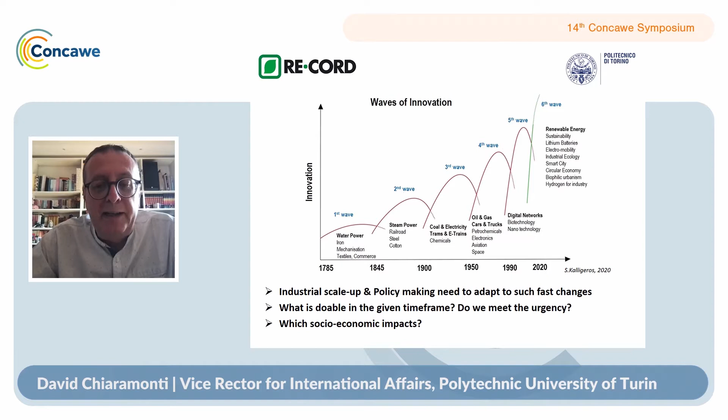If this can meet the urgency we had due to the climate challenge, and also as remarked a couple weeks ago by Timmermans, which are the socio-economic impacts of introducing innovation and how to build consensus. I like to repeat that one of the Green Deal's most important points is no one left behind. That is also a very important value for our community.

So I was invited to talk about thermochemical conversion, which mostly is fast pyrolysis in general, gasification, hydrothermal processing, hydrotreatment. In a biorefinery context, this is the part where you operate at high temperature with catalysts and all the steps we know. However, it's a major point for me to remark that this thermochemical pathway more and more should be seen as an integrated way with biochemical conversion.

Just to make a very simple example, in a lignocellulosic ethanol plant, we have biochemical processes based on enzymes and yeast producing alcohol or a variety of other fermentation products. And then we have the lignin part that could be very well treated with many of these thermochemical processing systems. Probably the real best economic solution is the one that integrates this variety of options into a single whole.

Among these, I will focus a bit on HTL and slow pyrolysis, because fast pyrolysis, gasification, and refining, I know will be the subject of the following presentation.

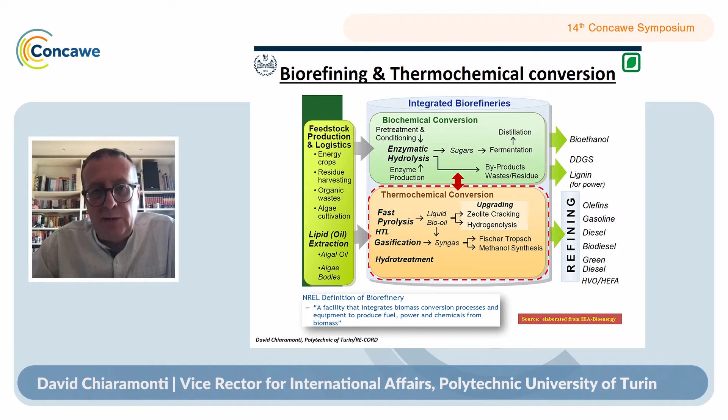I mean, most of this process, as said, produces several products, liquid, solid, and gases, that can be conveniently integrated and regenerated. Let me make one small remark.

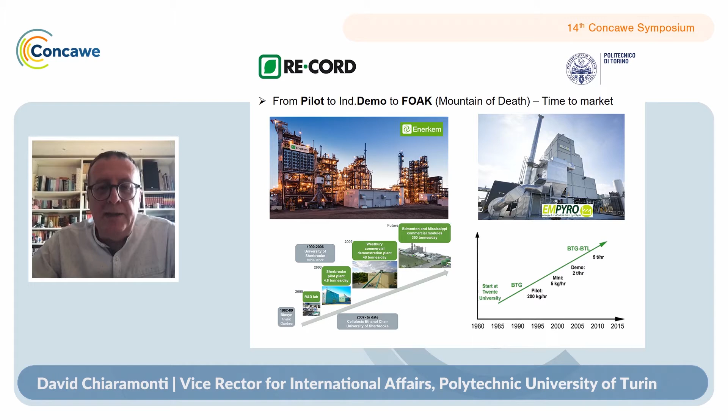Of course, today we have some advantage because many of these technologies already went through this pathway. So we can act a bit more quickly. But if you put this in the so-called mountain of death, well, actually what you see is that HVO is fully commercial. Others are coming very, very rapidly, even I would say, like fermentation of CO2 to ethanol, the conversion of HVO to HEFA for jet application.

Fast pyrolysis in co-processing particularly is ramping up quickly, and policy is following. And also gasification to various products, from Fischer-Tropsch but also to methanol and ethanol, is quite close. It's in the first-of-a-kind stage, and a lot of attention is given to waste-based feedstock in that area. Also, HTL and e-fuels are coming.

There are some scale-up projects in the hydrothermal liquefaction phase. E-fuels are a major point in European policy, and we can expect a contribution between 3 to 5% probably by 2030 with e-fuels, if the policy follows.

These slides have already been shown, so I will only pick up a key message here: the Concawe estimation, which I personally agree with, expects the ramping up and scaling of these technologies, particularly lignocellulosic and e-fuels, post 2030-2035. Having a demo plant is one thing; having many industrial scale plants producing millions of tons of products is another. That's a kind of misalignment with European policy that should be considered.

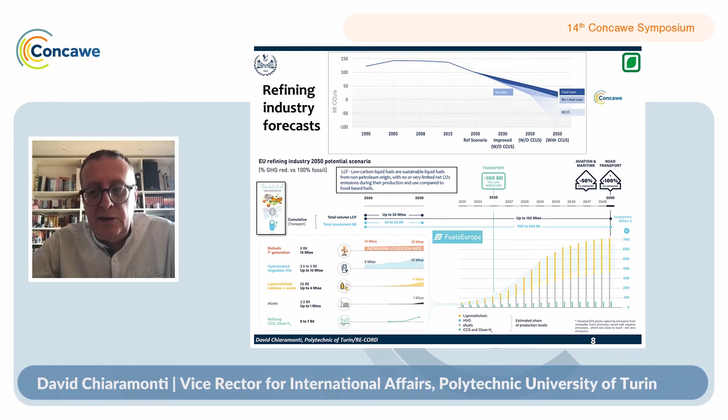Biomethane also can help a lot in the transition, contributing significantly in certain countries.

Following this, the net zero IEA report came in, which is very aggressive and, on the other hand, compatible with the targets we have set, with the goals we have established. It's a very strong roadmap, with no more internal combustion engine car sales by 2035.

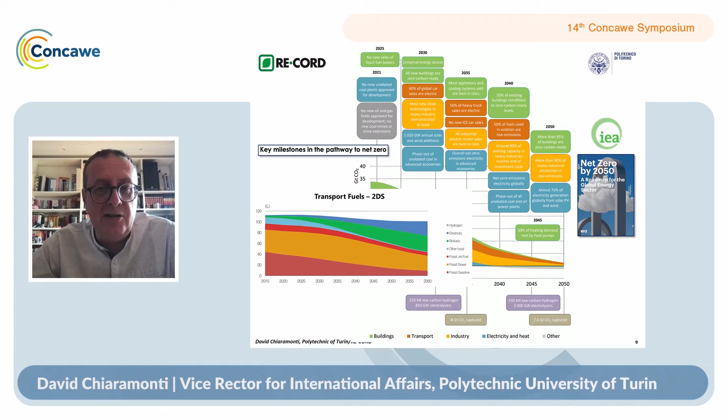Compared to a previous IEA study like the sustainable development scenario, the two degree sustainable development scenario by IEA, the contribution of the different sectors was a bit different, even at 2060. Now there's a clear acceleration. The question is, are we able to follow such a strong path?

I will focus now, in the last part of my presentation, on a couple of issues. One is thermochemical conversion, from pyrolysis and gasification. That's a process that always produces solid, liquid, and gas, requires dry feedstock, and can operate at very different conditions. It has quite a good level of maturity in general, and is more or less feedstock sensitive depending on the type of process considered.

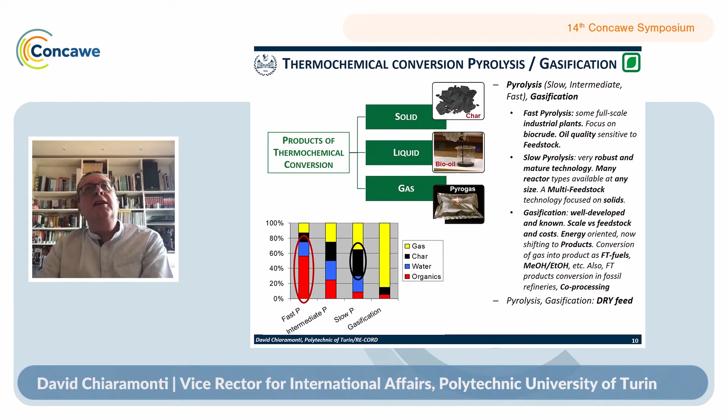Hydrothermal processing instead is mostly hydrothermal carbonization and hydrothermal liquefaction. For fuels it's liquefaction, which operates in very severe conditions, 220 bars, 374 degrees being the critical point for water. It operates in slurry conditions where up to 23% of solids is contained in the liquid phase, which is normally water but not necessarily just that.

Technically speaking, this is obviously a challenging type of plant, which is scaling up in Canada and Norway. A few pilot installations exist in Europe, particularly in Denmark, Italy, a few other places, and in the US at PNNL mostly. It processes very wet feed.

On the HTL side, there are routes for development in that period. The focus, again as in all this sector, is being assigned to residual waste feedstock, and there are companies like Genifuel, Steeper, ENI, Mura already working at demo scale on this feedstock. There's also the possibility to co-liquefy feedstock with some advantages for the technology. Not to forget the relevance of water management, I will come back to this in a moment.

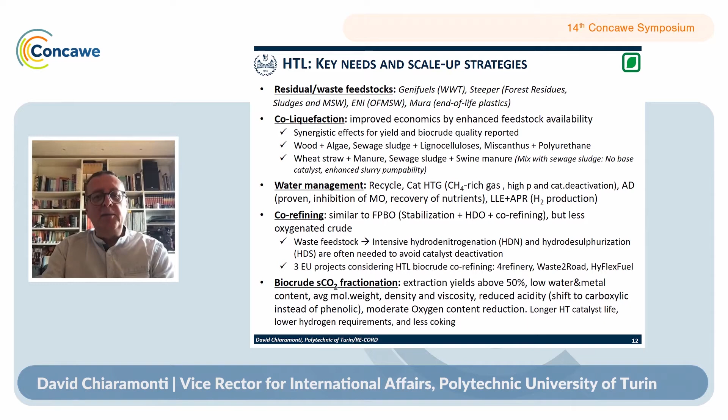Co-refining could also work similarly to what is being done for fast pyrolysis bio-oil, even if we have to consider that getting a less oxygenated biocrude is an advantage, but it is very viscous stuff which can contain heteroatoms. Also, supercritical CO2 fractionation is under deep investigation.

I wish to focus a second on phase management, water phase management, because in the water we do have soluble water organics. These can be treated in various ways, even catalytic hydrothermal gasification, or even digested through a biochemical process, again in the case of integration between bio-based and thermochemical-based processing. But one thing I'm very keen on is that this can be used for hydrogen production.

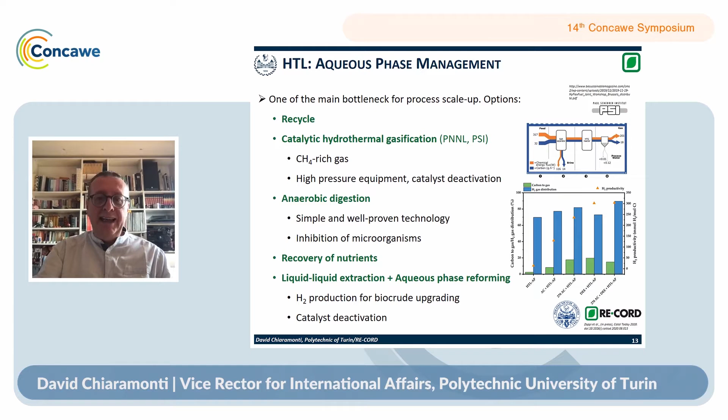In our joint group, Polytechnic of Turin and RE-CORD, we have applied a technology named aqueous phase reforming, and the amount of hydrogen is quite relevant compared to the amount of dry hydrogen needed theoretically to refine the biocrude obtained, from 40 to some 70-80%, depending on the feedstock type, process condition, and other elements. So the water phase, which inevitably needs to be recycled in processes like this, can be a good source of green hydrogen in a fully circular form.

In the last part of my presentation, I wish to show some innovative schemes beyond the technology, combining bio and thermal. For example, many decentralized natural gas plants use the natural gas grid exactly the same way as we use the electrical grid with photovoltaics and wind energy. This natural gas delivers an equivalent amount of volume of natural gas to a centralized processing facility that can then deliver Fischer-Tropsch, methanol, ethanol, and many other products.

The guarantee of origin is the means to guarantee that there is no double carbon counting for this carbon, and that exactly the amount of normal cubic meters delivered by natural gas is delivered to the centralized processing. This is based on mass balance. Italy can rely on more than 33,000 kilometers of gas pipeline, so it's a good way to deploy the existing infrastructure and to deliver from the gas a product that is needed.

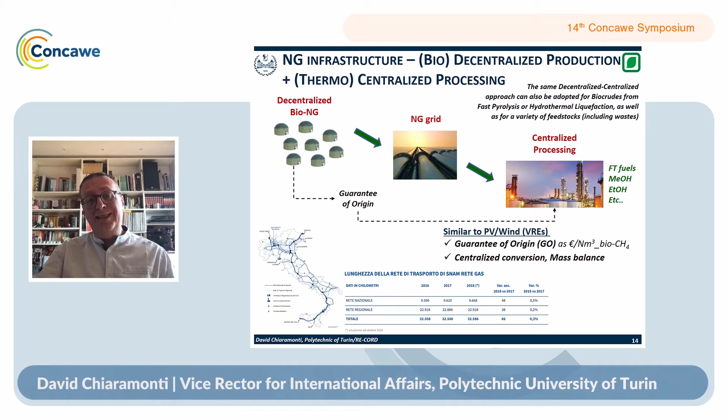Also delivering benefit in a decentralized way, so creating consensus. Another possible approach is so-called biomethane, or methane pyrolysis or cracking, or direct methane decarbonization.

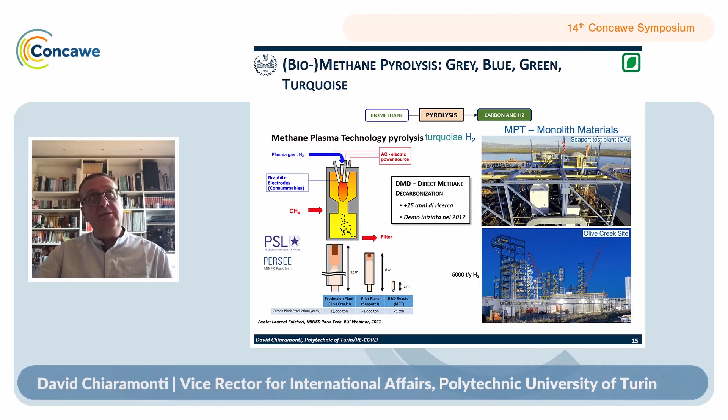This is a site in the US which already reached 5,000 tons per year hydrogen production through thermochemical processing of the methane. This is done in a special way in a process developed by École des Mines in France more than 25 years ago. But there are other ways to do this.

We have developed a very original other route to process the methane into carbon, solid carbon, and hydrogen. The interesting thing is that it promises to be very competitive. I remind you that today we are in the range of $4 per kilogram of hydrogen, while our target is $1.5 per kilo of hydrogen.

This biomethane pyrolysis seems a promising way to reach this target, even if TRL is lower, and there are a number of competing solutions like ours, like the one I've shown, that need to be further developed. That's the moment to invest in this.

Aviation has been mentioned as a priority. ICAO, which I participate in, this team, has shown a huge need to intervene through the CORSIA program. It can be very well targeted by gasification and pyrolysis. Personally, I have my opinion that pyrolysis can very well target maritime for a number of reasons related to the biocrude characteristics.

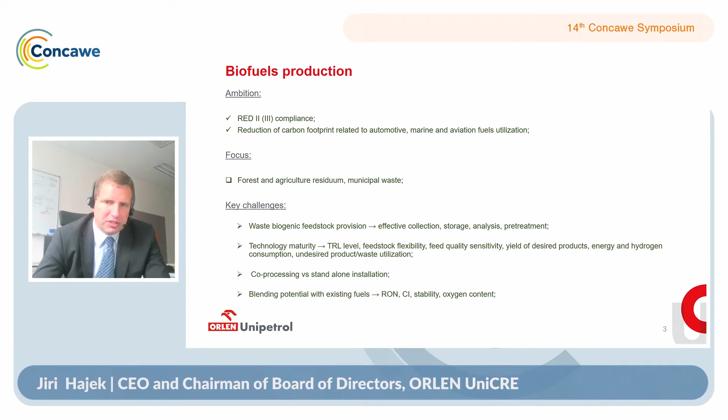I would like to briefly share with you the outcome of our COMSYN concept, which we have studied over the last couple of years together with colleagues mainly from VTT from Finland and other partners from Germany and Italy. The concept was focusing on the gasification of forestry residue, aiming to convert the gasified material into Fischer-Tropsch products and accommodate those Fischer-Tropsch products either in the refinery or introduce them to the steam cracker.

The ambition was to deploy a concept which will enable us to operate a unit with a capacity of 150 megawatts at the gasification stage and reduce production cost in contrast to the alternative routes by 35%. And we wanted to deliver the fuel with a cost below €1. Actually, the aspiration was to achieve 80 cents per liter.

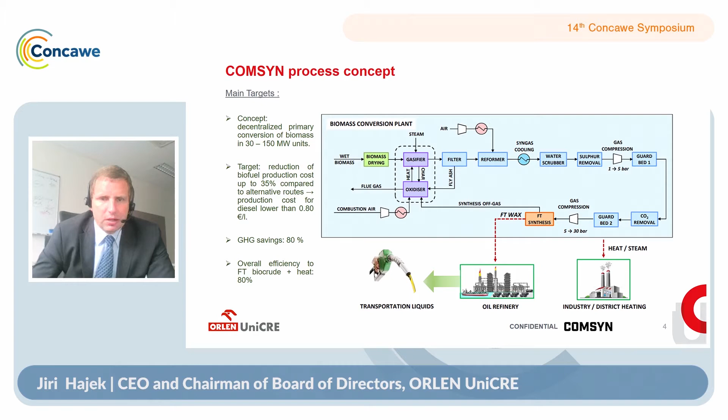Ultimately, the overall aspiration was also to achieve greenhouse gas savings in the range of 80%. And similarly, the efficiency should have been elevated. What we have achieved shall be demonstrated on an upcoming slide.

For those who are not very familiar with the entire process, with the entire concept, I would like to stress that the gasification and the consequent Fischer-Tropsch technology produce not only gaseous, but mainly liquid products. Not only liquid products, but also waxy products. The yield or the split can be adjusted according to the needs of the particular operator.

But we can say that in our case, we were targeting mainly the hydrocarbons boiling in the range of 140 to 240 degrees C, but also we produce a significant amount of waxes, which shall be effectively introduced as a feedstock to the existing hydrocrackers.

So in principle, I would like to stress that the flexibility of the operation of the particular Fischer-Tropsch technology very much depends on the desired yield pattern, as well as on the operating conditions of your technology. What can we achieve by doing this?

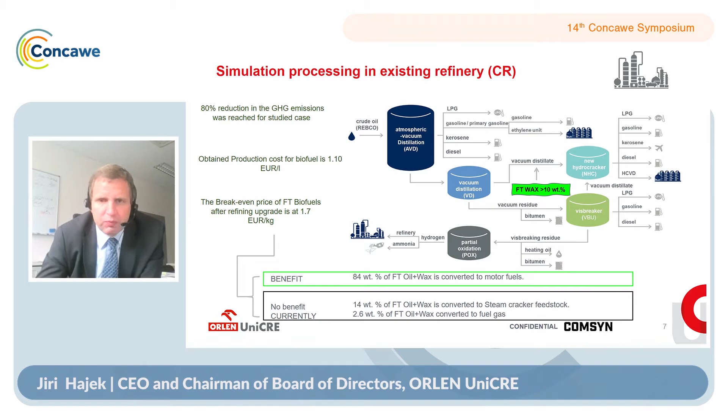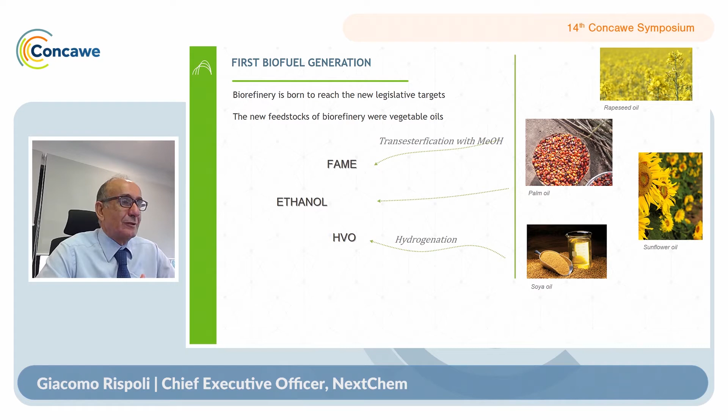Going ahead, the products that we had to generate as biocomponents, at the beginning we have and still have FAME for diesel, we have ethanol for gasoline, we have hydrogenated vegetable oils also for diesel. These are the new feedstocks, the biofuel stocks that help to reduce CO2 emissions.

But then the European Parliament said, look, we have to pay attention not to be in competition with food. So the European Parliament limited to 7% the use of first generation biocomponents, and then introduced the concept of advanced biofuels that cannot be in competition with food.

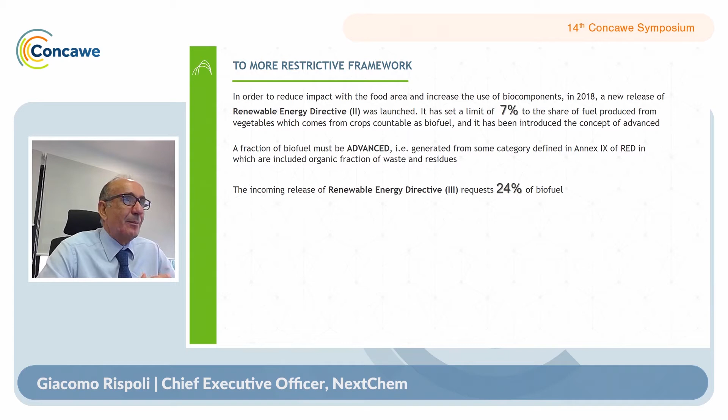Now, with the first draft of RED III that we have looked at, we see that the quantity of biocomponents should be increased, arriving at up to 24% for biofuels. This means there is a huge effort we have to make in order to create more biocomponents and fuels with low carbon footprint for diesel and gasoline. For these reasons, we looked at this new concept of biorefinery.

Biorefineries played and are playing an important role today, but in the future we imagine the biorefinery with different feedstocks, based on municipal solid waste and non-recyclable plastics.

But why are we looking at feedstocks such as these? Because waste contains a lot of carbon. If you look at these slides, there are two important messages I would like to deliver to the audience. One is that today the total municipal waste produced in the world is in the range of 2 billion tons per year, and this is expected to more or less double in the next 30 years.

The second message I would like to deliver is that in this municipal waste and in these non-recyclable plastics, there is still a lot of carbon and a lot of hydrogen. So our idea is to take advantage of this hydrogen and carbon to reformulate new hydrocarbons.

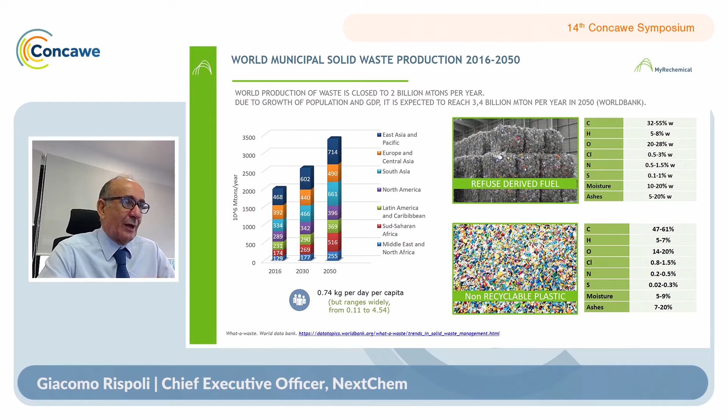Now, in what way can we imagine this new concept of biorefinery? This new biorefinery can be organized in 3 blocks. In the first block, we have in our scheme a waste partial oxidation, where we create - no longer incineration, no longer total full oxidation, but just a partial oxidation to create a syngas.

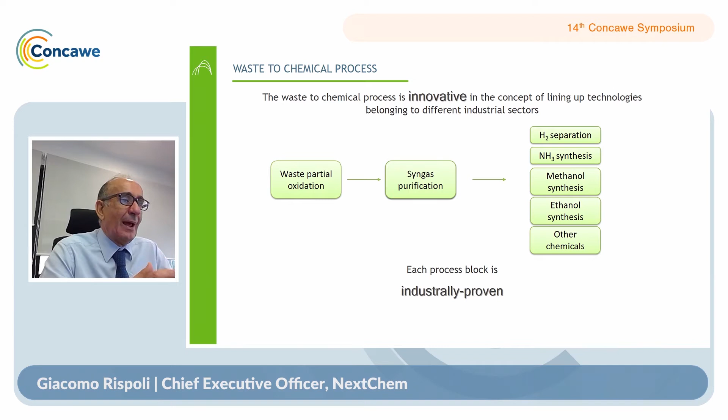Once the syngas has been generated, it will be purified. So there is a second block for purification, and then when we have the syngas purified, we can apply existing technology to produce hydrogen, methanol, etc.

But how does our system work? It is in this slide. I would like to summarize how the system can work. First of all, our feedstock is not all municipal solid waste, but our target is to first recycle and recover everything in accordance with the best procedures.

But once we look at the bottom of our pyramid as the feedstock, it is something that today is sent to incineration. Instead of sending it to incineration, we send this to our reactor. In this reactor, working around 1,000 to 1,200 degrees C at the top, the carbon and hydrogen are converted into syngas - a mixture of carbon monoxide and hydrogen.

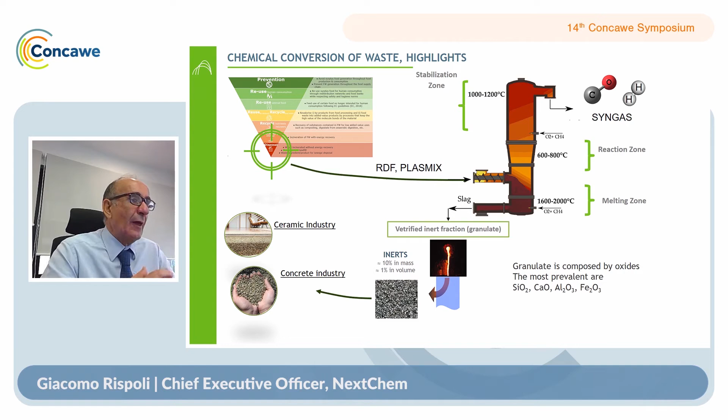The gas generated is washed first with water, then with hydrochloric acid, and then there is a neutralization tower. The bottom that we generate, containing inorganic components, is more or less 16% of the waste. So our technology looks like a sort of full conversion, a waste full conversion technology.

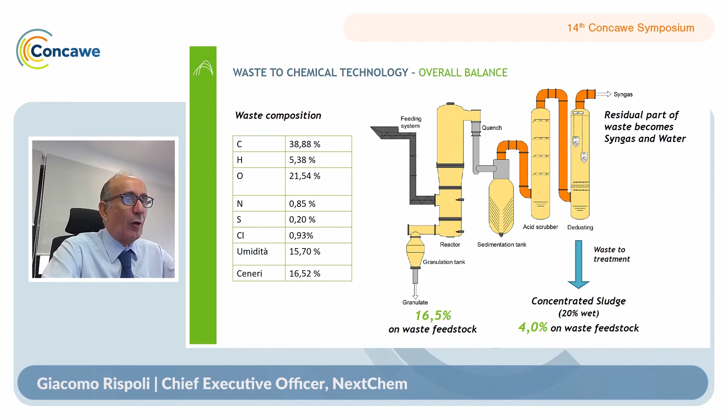The only product that we have to deliver as waste that we generate is the concentrated sludge that we remove from the neutralization tower. It is in the range of 4%. This means that 96% of the feedstock is converted completely.

Now, once the syngas is generated, the main products we are looking at are methanol. And with methanol we can produce FAME, diesel, MTBE, but methanol is also very important as bunker oil, because methanol can replace bunker oil. We can also generate hydrogen directly, for fuel cells, but also hydrogen that can replace part of the fuels in the shipping industry, and also green ammonia. But with syngas we can also generate ethanol, which can be used directly in direct blending for gas. Or we can generate methane.

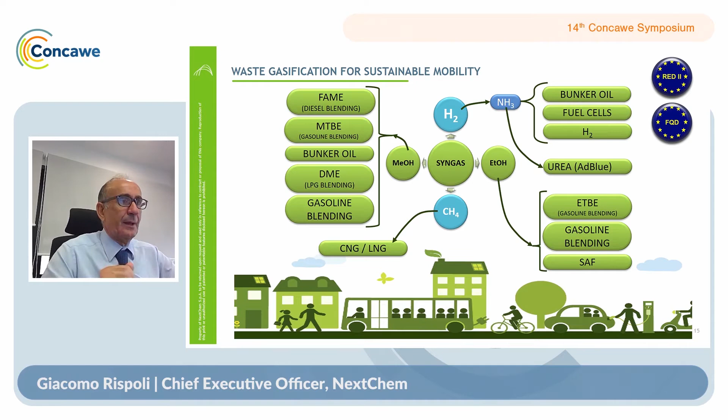Now, in this slide, without going into details, I would like to leave the participants of this symposium this material balance, where I base this business case in terms of waste to methanol and hydrogen. In our case, with the total material balance, you can see that with more or less 200,000 tons per year of waste, we can produce 90,000 tons of methanol per year, and more or less 2,000 normal cubic meters per hour of hydrogen. So we imagine these schemes that allow the production of methanol and hydrogen.

And in this way, as the demand for hydrogen increases, we can increase hydrogen production and reduce methanol production. The capex that we imagine for this unit is 220 million euros with such a capacity, looking of course at inside battery limits. And the IRR of projects like this is in the range of 13%. So a double-digit internal rate of return is a significant figure when you talk about green economy.

Then this slide is also very important, because the products we mentioned can generate important environmental benefits. Now, of course, we have to reduce the CO2 footprint. We would like to still produce products for our cars, for internal combustion engines, but of course with much less CO2 footprint. And in our case, the product that we generate can save more than 80% of the CO2.

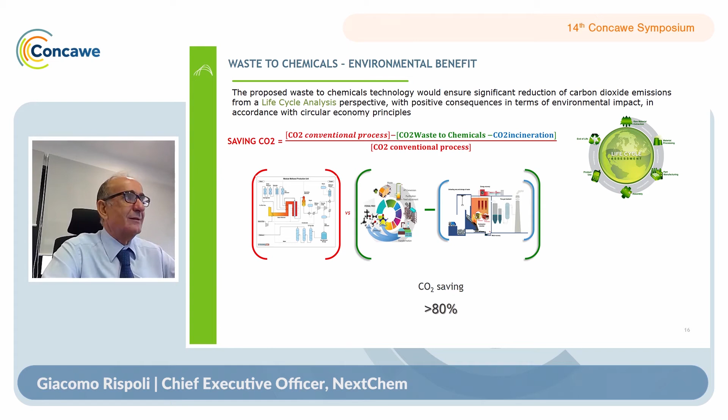Now, but in this part of the symposium, we are looking at refineries. In the introduction, it was said that refineries, during this CO2 reduction roadmap, can play an important role, can be part of the solutions. And so such kind of units can be located, can be hosted in the refineries. Why? Because refineries are still brownfield available, and because in the refinery we have existing facilities that can be easily integrated with our process.

In the refineries, let me tell everybody that in the past, in another organization, I was twice a refinery manager. I know very well that in the refinery there is huge knowledge available. And this huge knowledge available is something very important to operate such kind of units, which are more or less like conventional units present in refineries or petrochemical complexes.

And then oil companies are also the off-taker of the products, because if we produce ethanol, if we produce hydrogen, if we produce methanol, the oil companies need to produce biocomponents, advanced biocomponents, and so they can be the off-taker. And then such kind of units in the refineries can give a contribution to CO2 footprint reduction.

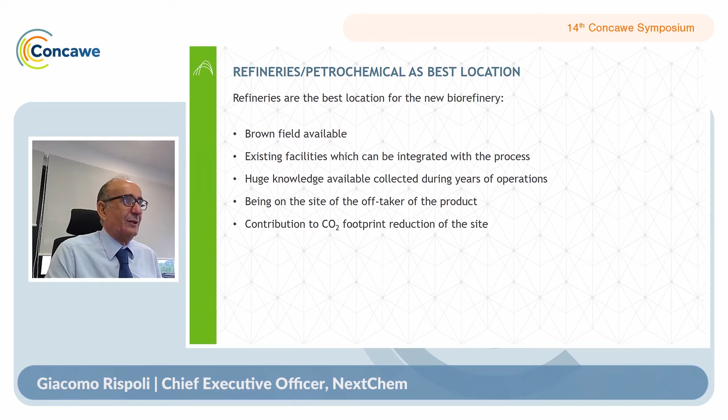Now, let me say a few words about the value of the products we are going to generate, because such units are significant and important from a CapEx point of view. But what will be the price of methanol? If we are going to produce methanol, what will be the pricing?

First of all, in accordance with RED II, but also with the draft of RED III, this kind of methanol is considered a recycled carbon fuel. And part of these recycled carbon fuels is considered advanced biofuel, because part of the carbon contained in the waste is from biogenic derivation.

But look at the price. How do we assess the price of this methanol? The conventional price of methanol currently is more or less 400 euro per ton. So we assume we start from the price of FAME, which is around 900 euro per ton, with 38 megajoules per kilogram. Our methanol has 20 megajoules per kilogram, so it's very easy to find the value: we divide 20 by 38 and multiply by 900. This way we correlate the price of methanol with the price of FAME.

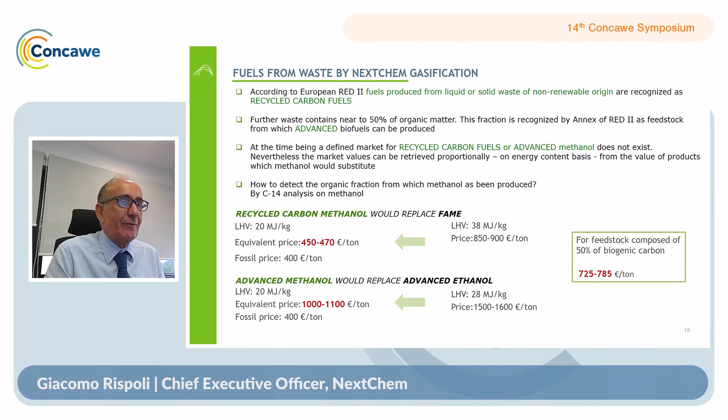If we would like to imagine the price of ethanol, it's more or less the same approach, making use of the price of ethanol in the market, which is 1,500 to 1,600 euro per ton.

Now, time is completing, so let me go to my conclusion. To summarize, the technology we generate as NextChem is a robust and commercially proven technology. Why commercially proven? Because it's a combination, as I mentioned at the beginning, of three different blocks, and every block that is part of this unit has been operating for a long time.

This process represents, in any case, a viable economical project, and waste is a valuable source of carbon that can be used. We call waste a sort of oil of the third millennium. So it's a pity to treat waste just by incinerating it to produce power. With the waste, we would like to create, with a circular economy approach, new products. So waste, with this concept, becomes once again a raw material.

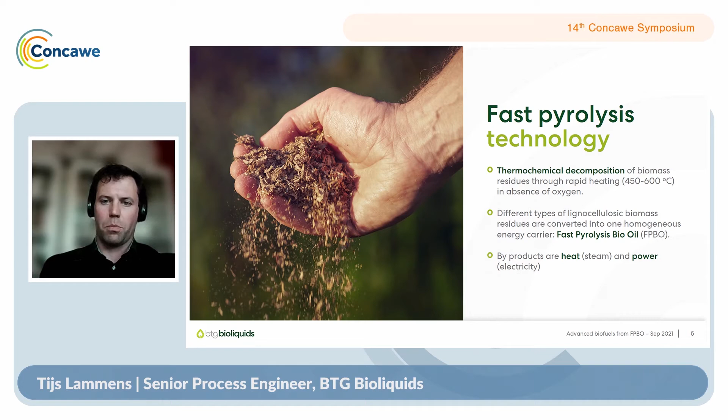The vapors then go through 2 cyclones into a condenser where the actual bio-oil is formed, and that goes to a storage tank, while the char that is produced with the pyrolysis process goes together with the sand and air up into a combustor. In the combustor, the char is combusted, and that creates the heat to keep the process running and to further crack the biomass again. So it's a self-sufficient process. All the heat that we use is produced by the process itself, including the heat that is needed to dry the biomass beforehand. And then also there can be an excess of heat which can be exported to external clients and even turned into power if you want to supply the power for the plant.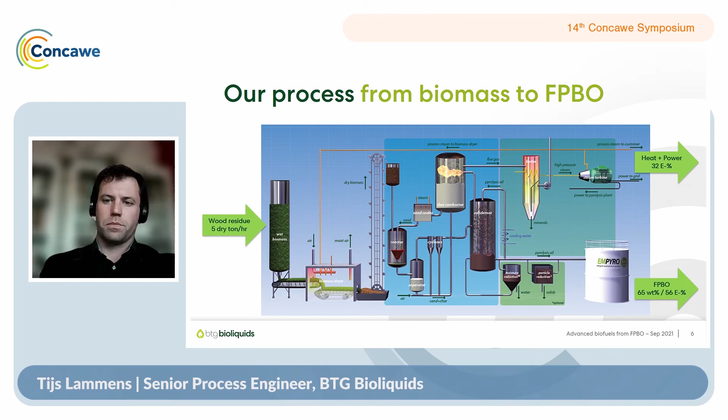Then about the technology deployment, I already mentioned the 3 commercial projects. Here you see pictures of them. The first one in the Netherlands, Empyro, was already started up in 2015. And in 2019, we sold this pyrolysis plant to Twence because we are a technology provider, not a pyrolysis oil producer. So for us, it's important to build the plants and supply the technology, but we do not want to operate them ourselves. And then recently, as I mentioned before, in Finland and in Sweden, projects were started up.

I want to say a few words more about the PyroCell project in Sweden, because I believe it's quite relevant also for this symposium. PyroCell is a joint venture of Setra and Preem, Setra being a wood processing company in Sweden and Preem the Swedish oil refiner. It produces pyrolysis oil from sawdust. The plant started up this month in September of this year. It was delivered turnkey EPC by Technip Energies. So we have a collaboration agreement with Technip that they supply the pyrolysis plants using our proprietary technology.

The plant produces about 24,000 tons per year of pyrolysis oil, and it provides a greenhouse gas reduction of between 80 and 90%. And then the Preem refinery in Lysekil will co-process the pyrolysis oil to produce advanced biofuels. Of course, this is in compliance with, for example, the EU Renewable Energy Directive, Annex 9.

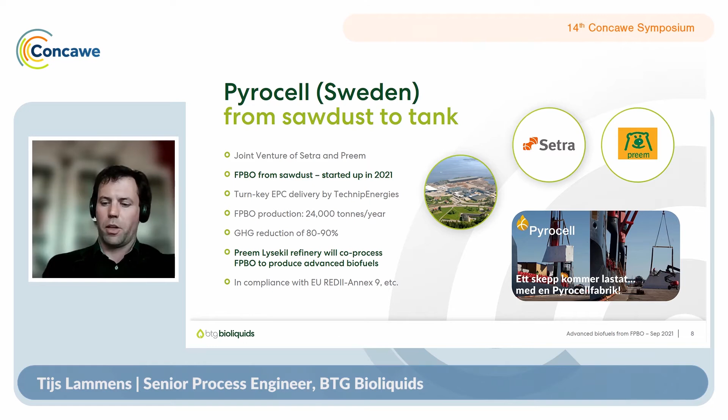Then about the application I want to talk about today, which is the refinery processing of pyrolysis oil to produce advanced biofuels. Let me start with the pyrolysis oil supply chain, because I think in that sense our thinking may differ from others, so I think that's important to highlight. We believe in the local processing of biomass residues, because the scales of the refining industry and biomass industries are quite different, and that was already mentioned as well.

We built the size of our pyrolysis process to match the biomass industry rather than to match the refinery industry, and that has the advantage that you can locally process the biomass residues, so you don't have to transport them all over the place. You can return the minerals to the soil, and then you only transport the bio-oil once it's produced. So it's a liquid, which is about 10 times denser than the solid biomass. So it gives you quite some benefits for the logistics and the transportation. Then centrally, you can further process or co-process the bio-oil, making use of existing refining infrastructure.

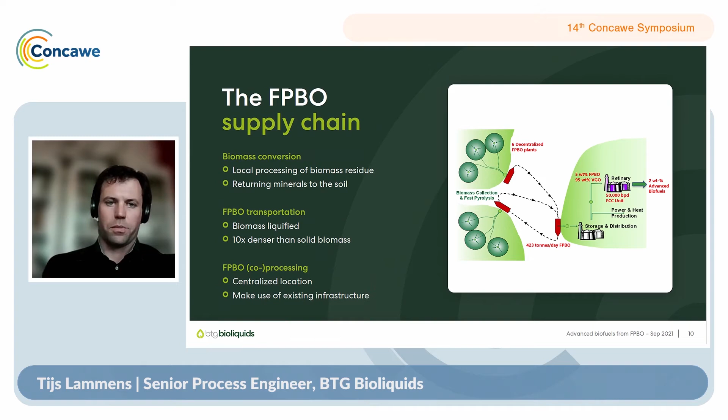If you then talk about volumes, what you see on the picture is a sort of an average European fluid catalytic cracker. If you want to co-process 5% of bio-oil, you need 6 pyrolysis plants of the size that I mentioned for a 50,000 barrel per day FCC unit, 5% co-processing, and that would give you about 2% of advanced biofuels in your product. So that's the kind of scales we are talking about.

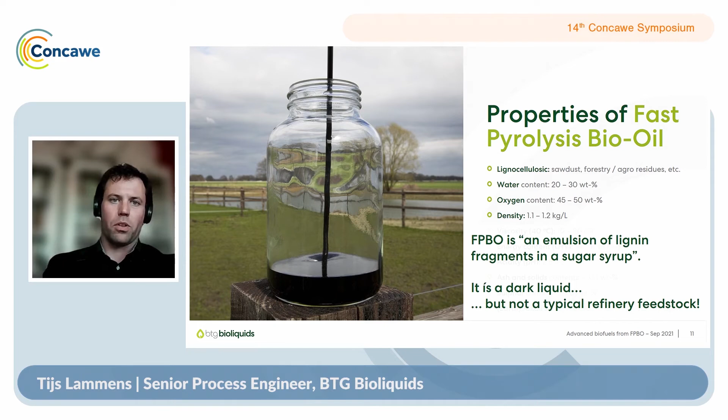Half of it in terms of weight is oxygen atoms that are present in various configurations. Half of that again is water. So around 25% of the bio-oil is water. You can remove part of it if you want, but not all of it, because then your oil will become solid. So it is an emulsion of lignin fragments in sugar, as we call it, chemically speaking. It's not your typical refinery feedstock, and that is important to realize before you start co-processing this material.

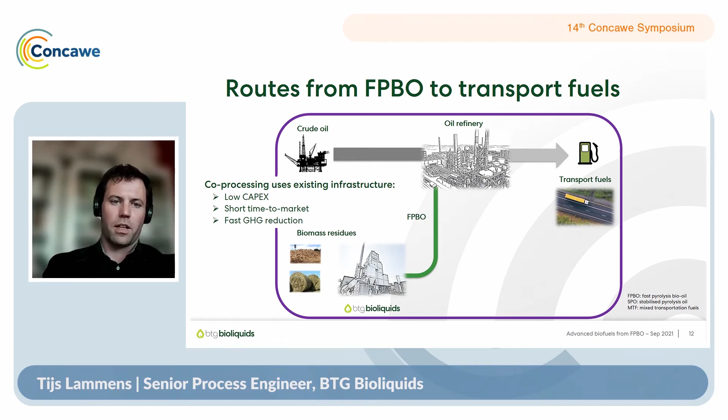I will say a few words about it in the rest of the presentation, so bear with me on all the abbreviations, the SPO, MTF, etc. But important is that the fast pyrolysis bio-oil route is the main part I want to talk about, because co-processing uses existing infrastructure. It's very low in capex compared to other solutions to produce biofuels. It can give you a short time to market. Essentially, it's already commercial, and with that, it can lead to fast greenhouse gas emission reductions.

The gateway for fast pyrolysis bio-oil is the fluid catalytic cracker, because, as I already showed the properties, an FCC can deal with this amount of water and oxygenates that are present in the unit, and also with the coking tendency of bio-oil. Of course, there are a couple of challenges when you use an FCC to co-process fast pyrolysis oil. There are many different outlets for the products. That means also that the biocarbon ends up in many different products, and then it is a challenge to track the green content.

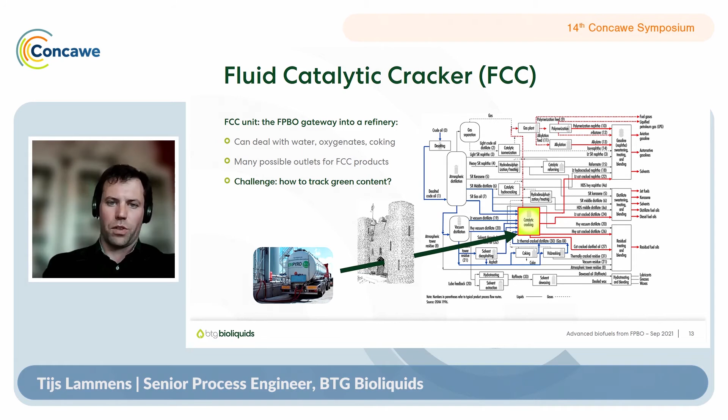But then once it entered your unit, the biomolecules will be cracked immediately with a regular feed. So the acidity will disappear. Also, the coking tendency will be much less. And as I mentioned, it's cracked together with the rest of the regular feed into all different products that you normally produce from your FCC, such as gasoline, LCO, etc. Commercial operability of this process has been proven in refinery trials of several days, up to 5% bio-oil. And also at pilot scale, it has been shown that you can even go up to about 10% bio-oil co-processing.

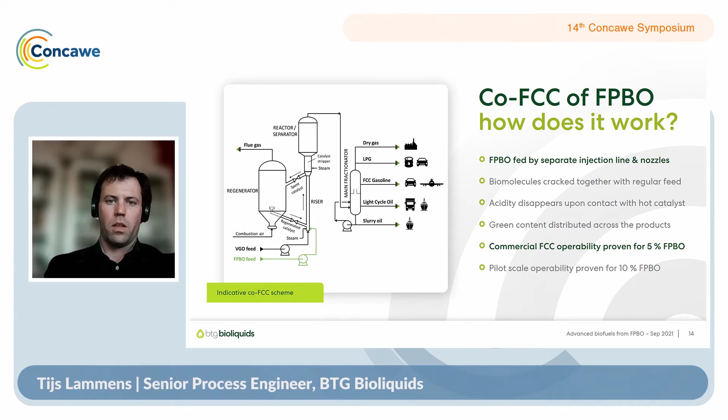Then the yields. If you co-process about 5% bio-oil, it has very little impact on the overall FCC product yields, which is what you expect, of course, if you only co-process 5%. You can see some general trends. Relatively, the gasoline yield increased. The LPG yield stays about the same, and some of the other yields decreased slightly. This is based on literature data that were published by Petrobras. Of course, it differs from one unit to another what happens exactly to the yields.

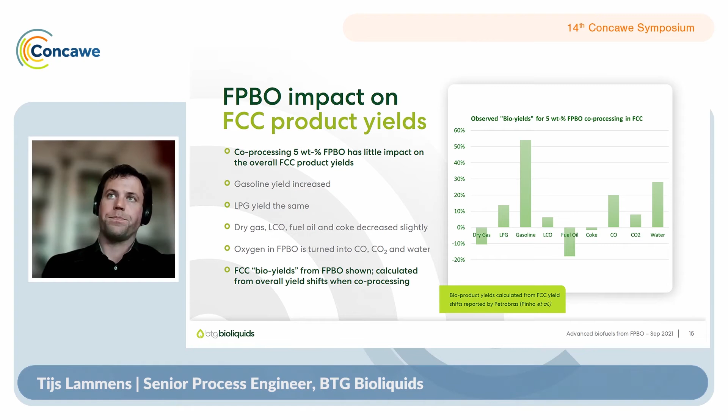Then there are some other refinery pathways that you can apply for processing fast pyrolysis bio-oil into advanced biofuels. One of them is hydrotreating, so you can do it standalone. Important when you hydrotreat pyrolysis oil is that you first do a stabilization. I already mentioned there's a significant coking tendency of bio-oil, so if you put it into a regular refinery hydrotreater with a fixed bed, you will probably coke that, and you get high pressure increase relatively quickly. So there's a mild process that you need to do to turn the sugars into alcohols, essentially, and to remove the coking tendency of the bio-oil. That's what we call the stabilization step, and that results in a stabilized pyrolysis oil.

The stabilized pyrolysis oil can then be further hydrotreated in regular processes like a nickel or cobalt molybdenum-based hydrotreatment step. And then you finally produce completely miscible deoxygenated biofuels.

A sister company of ours, BTG neXt, develops a demo plant for this process in order to produce marine biofuel of about 1,000 tons per year, which should be ready by 2023. And that should prove this process.

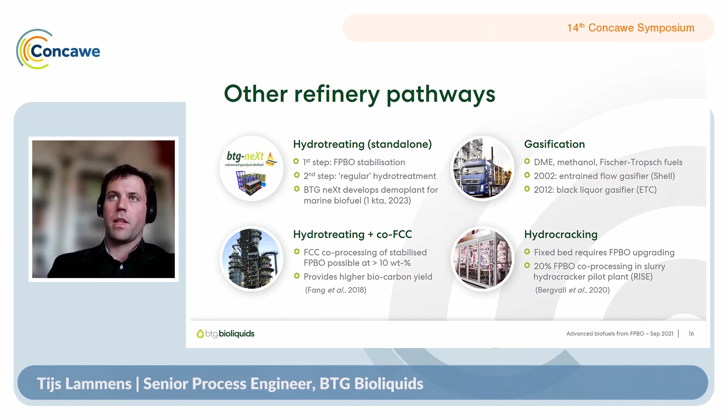So that's what I wanted to say about fast pyrolysis bio-oil. It has reached commercial maturity from a production perspective. There are currently 3 operational commercial production plants of fast pyrolysis bio-oil. If you want to use it to produce advanced biofuels, it has a high potential compared to other routes. It's low in capex. It's a very short time to market. And you can, with that, achieve fast greenhouse gas emission reductions as a refinery.

Feasibility of pyrolysis oil co-processing in FCC is proven up to 5 weight %. There have been several commercial scale trials around the world. So it's been shown that it works. It's been shown that you typically have a favorable gasoline yield, but of course the exact yields depend on your unit, on the type of feedstock that you use, on the exact process conditions, etc. And then there are also other refinery pathways for fast pyrolysis bio-oil besides the FCC, which are at various stages of maturity. So there's hydrotreating, hydrocracking, and of course gasification is also a very good option.